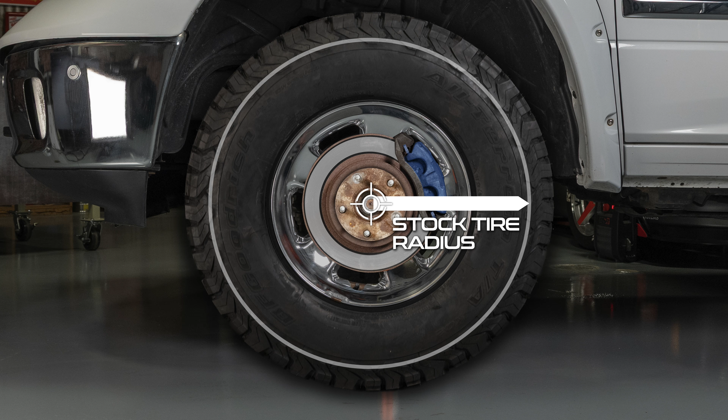Baer Brakes recognized this issue and conducted extensive testing that may change the way you think about your truck's stock braking system. When larger diameter tires are installed, the leverage between the tire and the braking system changes. This reduces overall braking effectiveness and requires more effort from the braking system to slow your vehicle.

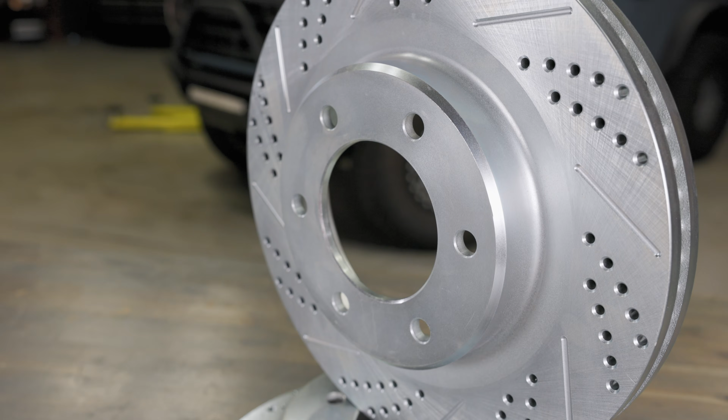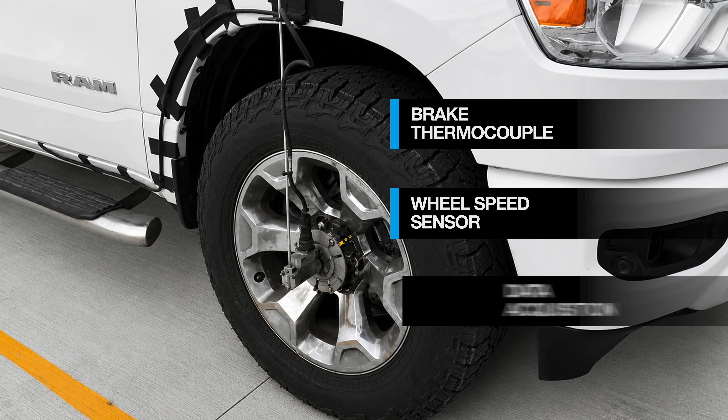To solve this problem, Baer developed their Big Claw brake kit. It's designed to restore the braking performance that is lost when upgrading to larger wheels and tires. Baer partnered with an independent testing company to measure brake performance using manufacturer-style instrumented testing and full vehicle proving ground evaluations. But before diving into the results, let's take a look at what the Big Claw kit actually includes.

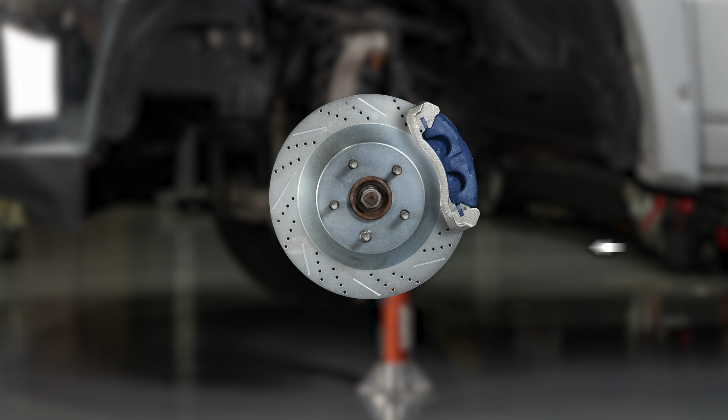The kits feature caliper relocation brackets that move the brake caliper farther from the center of the axle. This repositioning allows the installation of our larger Big Claw rotors, increasing the system's effective braking radius. Unlike traditional rotors with standard radial fins, Big Claw rotors use directional, internal vanes designed specifically for the direction each wheel rotates, helping improve airflow and cooling.

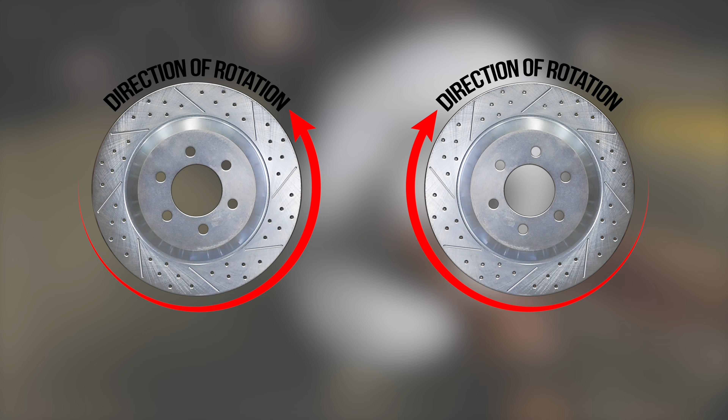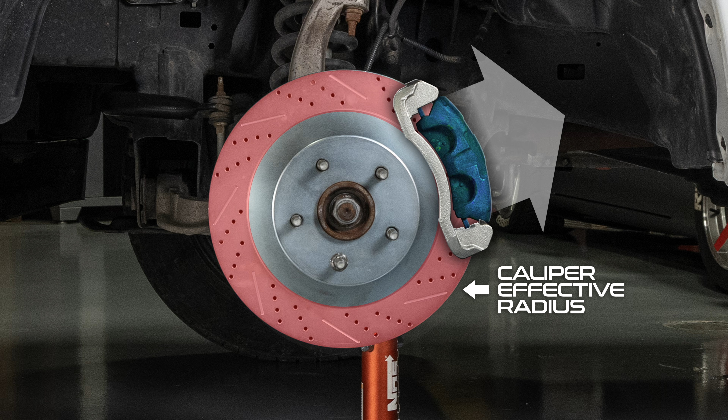Looking at a real-world example, here's a Ram 1500 with the factory rotor installed. When the Big Claw kit is installed, the larger diameter rotor becomes possible because the caliper relocation bracket moves that caliper outward. This change increases what engineers call the caliper effective radius. It's essentially the leverage arm that the caliper uses to generate braking torque.

Think of it like adding an extension to your wrench. The longer the wrench, the more leverage you have to loosen a stubborn bolt, right? Well, the same principle applies to braking systems.

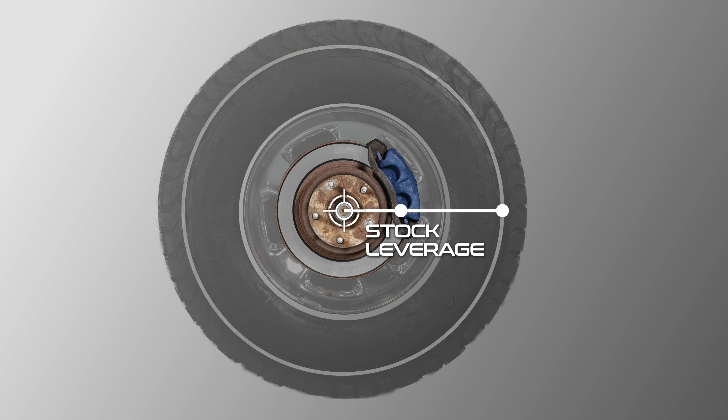When larger tires are installed, that leverage imbalance increases even further, thus reducing your braking power. The Big Claw kit restores that balance by increasing the brake's leverage through a larger rotor and repositioned caliper, helping recover the braking performance that was lost when installing oversized tires.

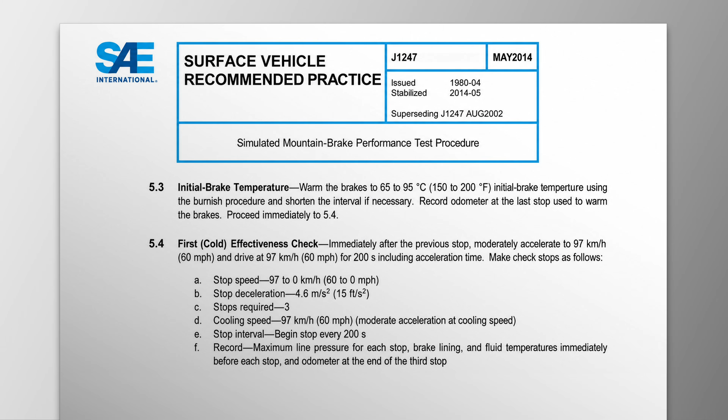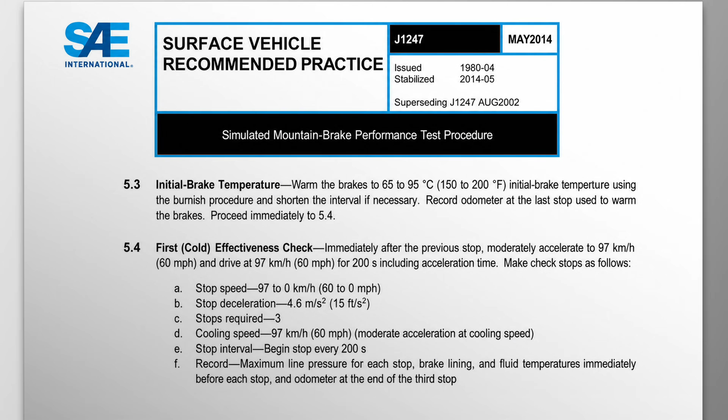Baer Brakes conducted controlled testing using the SAE J1247 simulated mountain descent test. It's a standard procedure developed by the Society of Automotive Engineers that simulates the stress of a long, downhill braking in a controlled environment. The test vehicle was a 2022 Ram 1500, fully loaded to gross vehicle weight and towing a 2,000-pound unbraked trailer.

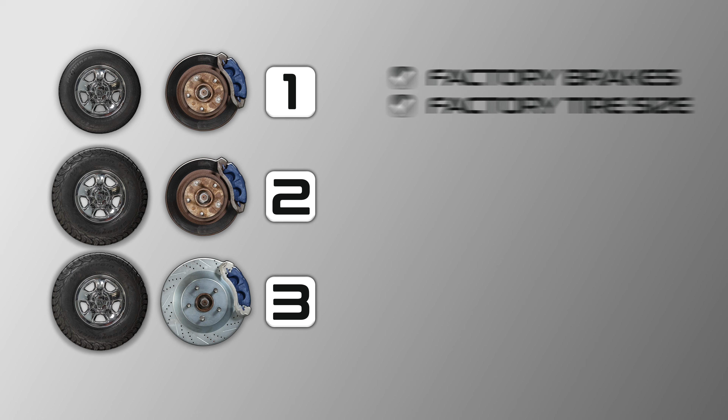Three configurations were tested. The first configuration, factory brakes with factory tire size. Configuration 2 was factory brakes with the larger tires. And configuration 3 was the Big Claw brake kit with the larger tires.

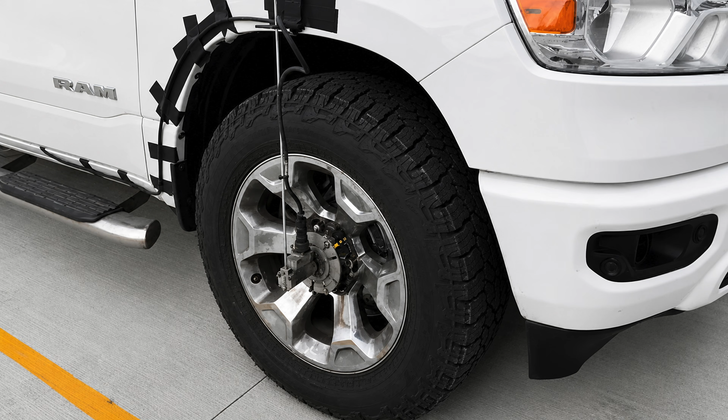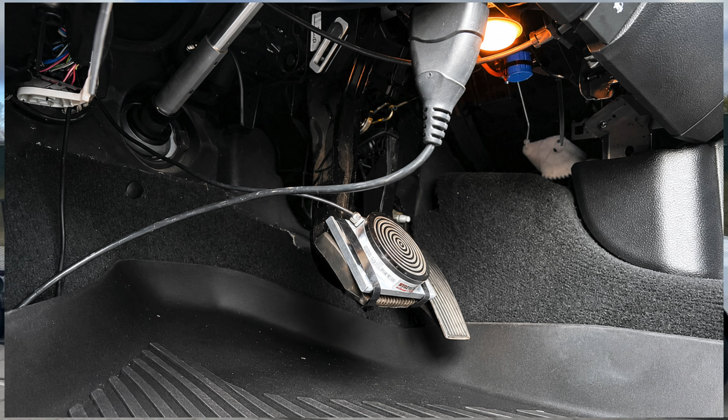The vehicle was equipped with a full data acquisition system that measured parameters such as vehicle speed, brake temperatures, pedal force, and engine data. Thermocouples were placed in the brake pads and rotors to track temperatures, while sensors measured brake pedal force and pedal travel during testing.

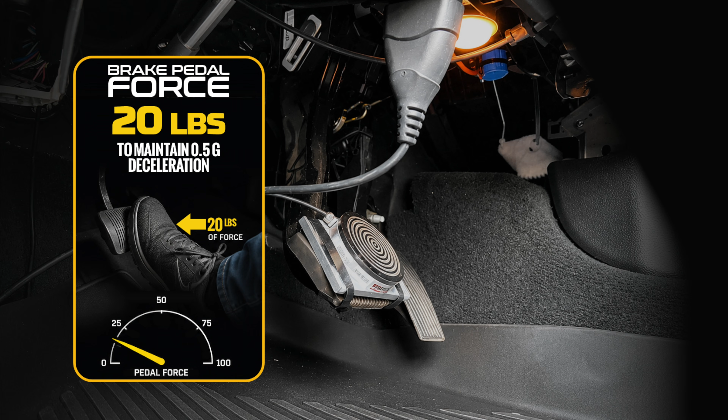Initial braking tests were conducted starting from 60 miles per hour and maintaining a deceleration rate of half a G to represent a moderate but controlled braking action. With the factory tires and factory brakes, the driver needed an average of 20 pounds of brake pedal force to maintain the target deceleration of half a G.

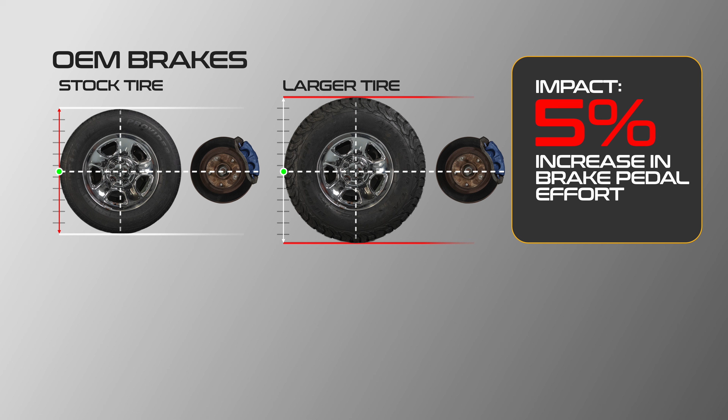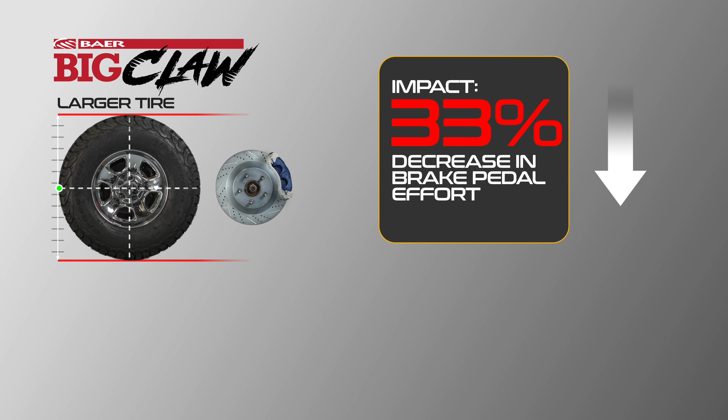After installing the larger tires, the brake pedal effort increased by nearly 5% due to the reduced braking leverage caused by the larger rolling radius of the taller tires. But when the Big Claw kit was installed with the larger tires, braking performance improved dramatically. Pedal force dropped by approximately 33%, restoring and even improving braking efficiency compared to the stock setup.

The simulated mountain descent test pushed the braking system even further. During 80 consecutive braking events within a 20-minute time frame, rotor temperatures climbed from around 300 degrees Fahrenheit to nearly 900 degrees Fahrenheit with the stock brakes and oversized tires installed.

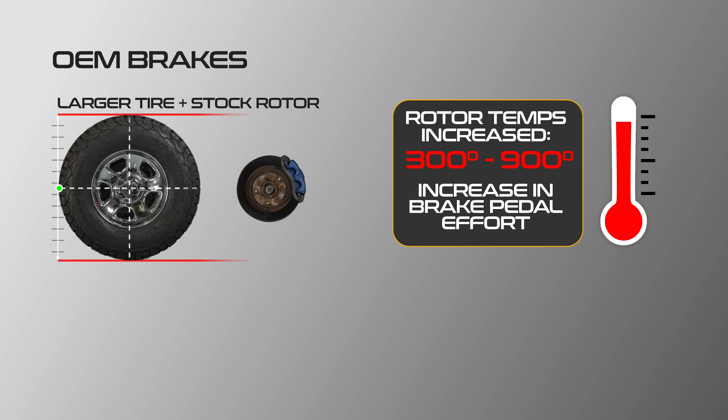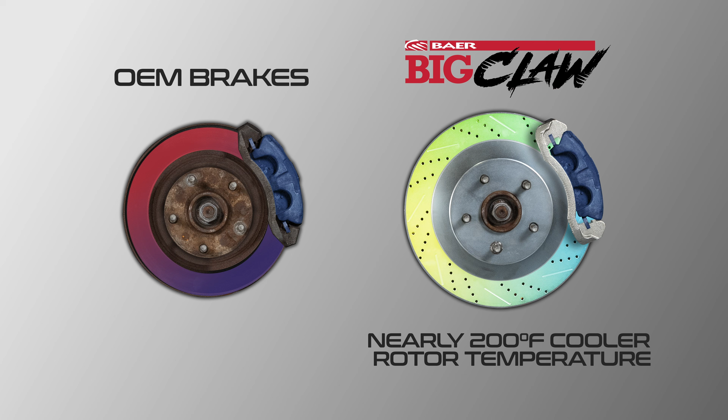As temperatures increased, the driver experienced brake fade and had to apply more than double the pedal force to maintain the same half G deceleration. In the exact same test, but with the Baer Big Claw kit installed, rotor temperatures dropped nearly 200 degrees, significantly reducing brake fade and maintaining more consistent braking performance under heavy load.

The result is a braking system that not only restores the loss of performance when installing oversized tires, but also improves heat management and braking consistency under even the most extreme conditions. For truck and SUV owners running larger wheels and tires, Baer's Big Claw brake kits offer a proven solution to regain braking confidence your vehicle is designed to have.